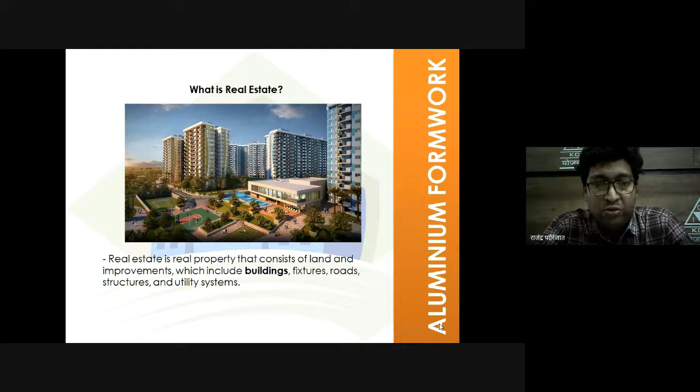So what is real estate? A real estate is a real property that consists of land and its improvements, which include building, fixtures, roads, structure, and utility systems. These are categorized into four: land, residential, commercial, and industrial building. Except land, these three come under the building sector.

The construction industry is rapidly changing, and new materials and technologies are being introduced on a regular basis. The execution of construction projects and their timely delivery has become a prime concern for developers, in view of buyer aggression on delay in constructions, especially after RERA, which emphasizes the need for timely completion of projects. So adoption of modern technology has become the need of the hour.

Rising industrial, residential, and commercial growth is driving demand for faster construction and world-class quality. So it has become imperative to use newer products and technologies to meet this increasing demand.

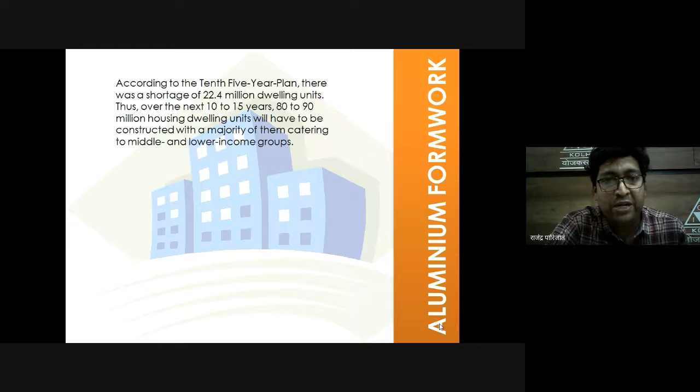As per the 10th 5-year plan, there was a shortage of 22.4 million dwelling units. Thus, over the next 10 to 15 years, 80 to 90 million housing dwelling units will have to be constructed, with the majority catering to middle and lower income groups.

The construction industry is an integral part of the country's infrastructure and industrial development. Today India's urban population is the second largest in the world, and its future development leads to increased demand for housing.

As per the Federation of Indian Chamber of Commerce and Industries, that is FICCI, keeping in view the existing housing crisis, the country shall need an additional more than 2.5 million new dwelling units annually.

So we need to plan for a rapid creation of dwelling units, because construction is a very complex process involving basically the areas of architectural planning, engineering, and construction.

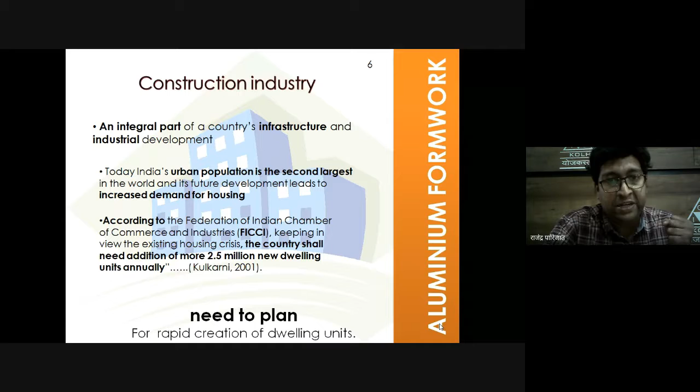We need to plan dwelling units which are affordable shelters to the masses, with speed of construction and faster turnover, creating a large stock in the shortest possible time. These are the elements of these dwelling units.

So now we can see which are the present technologies available in India. The first one is prefabrication technology.

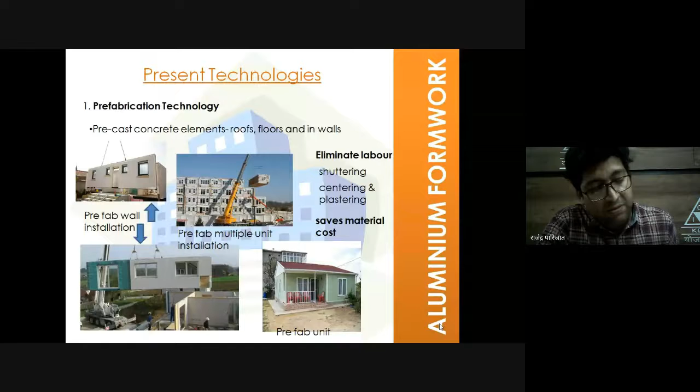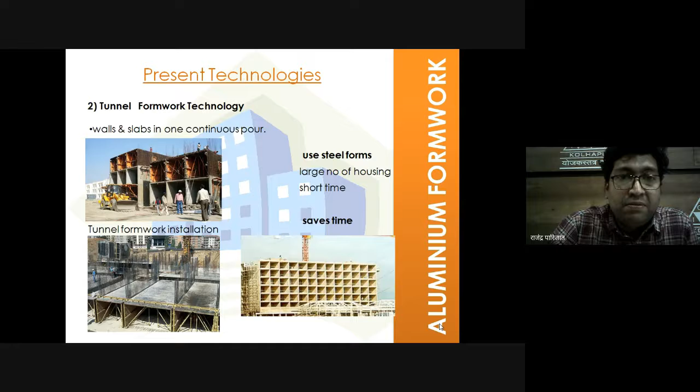Another technology is Outinord technology. It is a fast track construction system allowing the concrete walls and floors of structural units to be constructed in a 24-hour cycle only. Typically 2 or 3 complete structural bays are poured and struck during each 24-hour cycle using the same set of forms. This method is up to 3 times faster than the conventional timber formwork frame structure method.

This is a superior wall form system, known as the superior wall form system. It uses high quality steel with high performance quality control, making it a vastly superior technique.

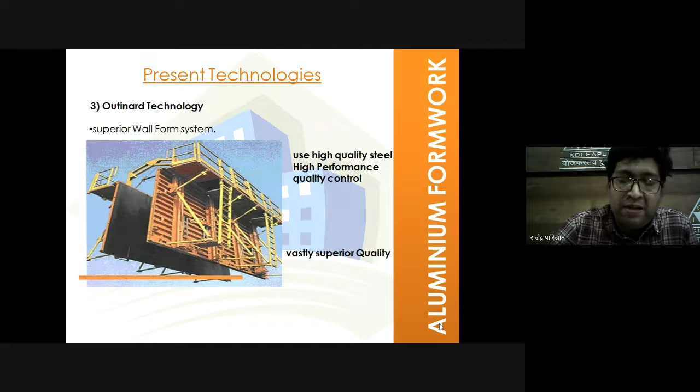Mascon forms all the concrete in a building, including walls, floors, slabs, and balconies, as well as window hoods, curved and decorative features, columns, and beams. Mascon enables all concrete to be cast monolithically, thereby eliminating joints. It completes the entire structure of the building at a rate of 4 days per floor only. All Mascon forms are erected and dismantled without cranes, using unskilled laborers equipped with only hammers.

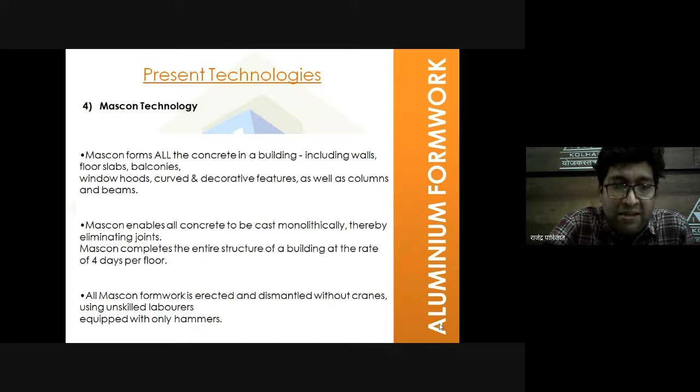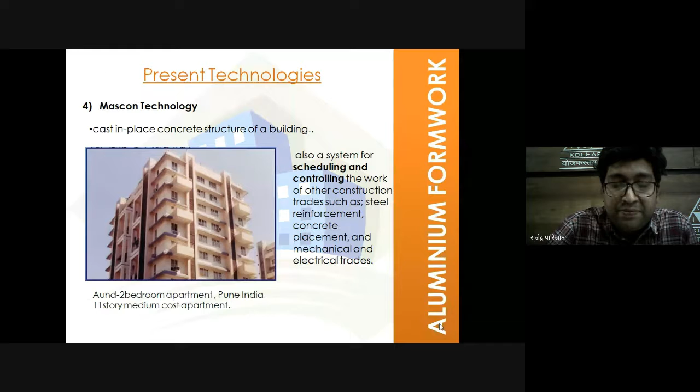So these present technologies have various possibilities and alternatives present in the market, but they are risky in nature. The financial viability of a project over long-term investment could significantly be affected at various phases of construction, leading to considerable time and cost overrun. We can see many government projects where the initial cost is, for example, 300 crore, and after a few years the cost gets upgraded to 600 crore or more - this is because of time and cost overrun of the project.

So there is a study about project stages and appraisal: the pre-feasibility stage of the project, then the technical appraisal - that is technical sanction if required, then the commercial appraisal, that is commercial viability of the project, then the financial appraisal, and topmost is the risk analysis of the overall project, which has to be studied during these project stages.

For determining the optimal strategy and market potential for adopting technology, certain common aspects have to be studied: studying various technologies available in India, selecting a good technology in the market, technological collaboration arrangements if any, the size and scale of operation, the location aspects of the project and availability of infrastructure facility.

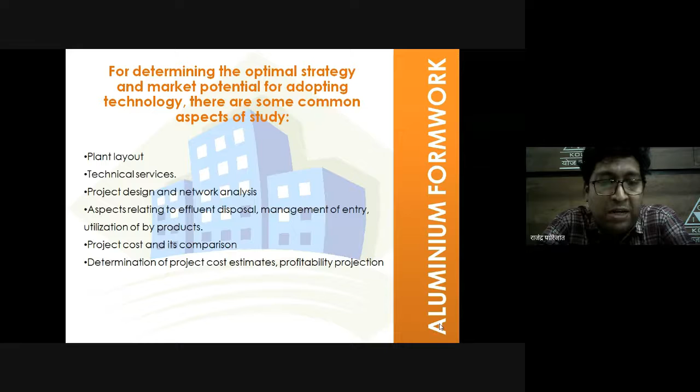Then comes the selection of plant machinery and plant layout, the technical services required, the project design and networking analysis using software like MS Project, aspects relating to effluent disposal management, utilization of byproduct, and the project cost and its comparison. Like if we take regular formwork and Mascon formwork, the project cost and its comparison have to be done. So determination of the project cost helps establish the profitability of the project.

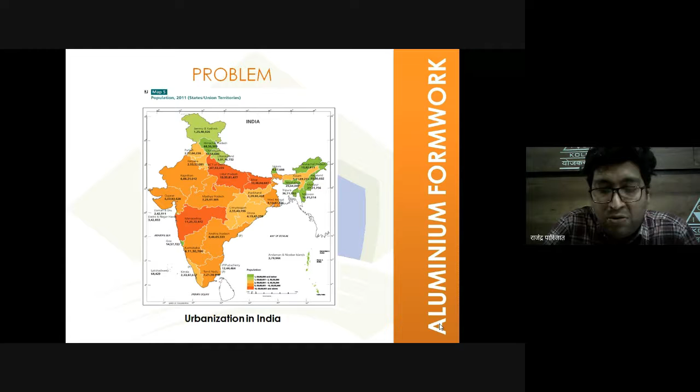So what is the problem? This picture shows the overall density of the Indian states. The dark picture shows the higher density, that is Maharashtra, Uttar Pradesh and Bihar have highly populated urbanized areas. After Uttar Pradesh, Maharashtra is the second largest populated state in India, that is approximately 11 crore.

So there is a housing demand. Because of this, there is a shortage of housing in India in both rural and urban sectors.

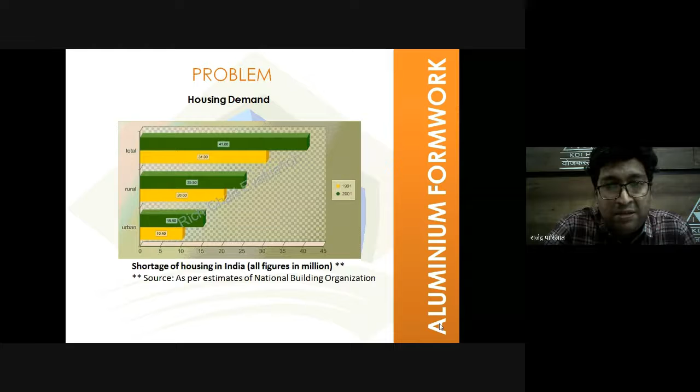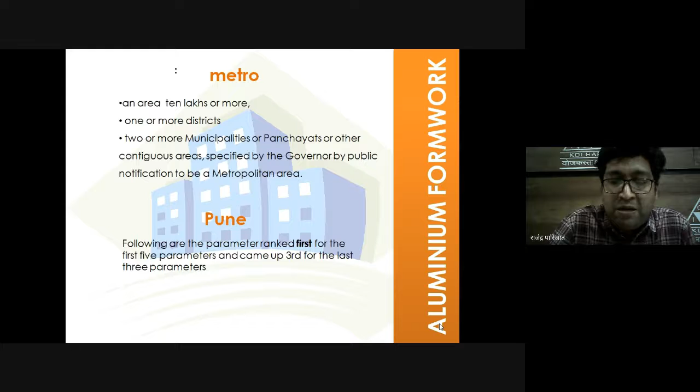So if we see Pune in Maharashtra, the following are the parameters ranked first for the first five parameters and come up to third for the last three parameters. Let's see what those parameters are.

The first one, business environment. Second, real estate cost and availability. Third, infrastructure availability. Fourth, educational institutes. And employment opportunity.

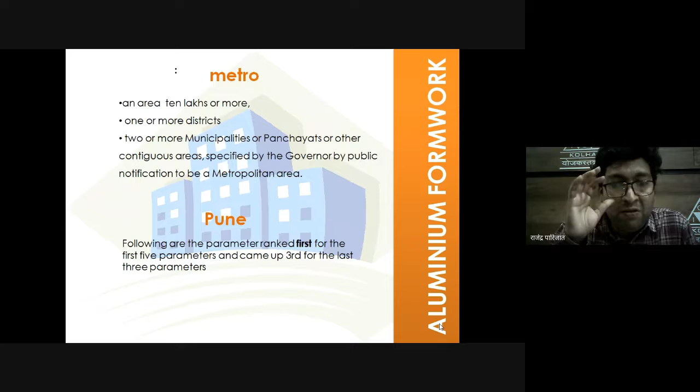Pune ranked first for the first five parameters, that is up to employment opportunity. Pune ranked first for this criteria, whereas social infrastructure, financial services, and transportation facility come third for Pune.

So Pune is growing on all four sides with different township projects like Blue Ridge and Megapolis Township on 150 acres of land with 1,500 crore of investment, whereas Amanora has 400 acres of land with 10,000 crore of investment, and the Paranjape scheme has 138 acres of land.

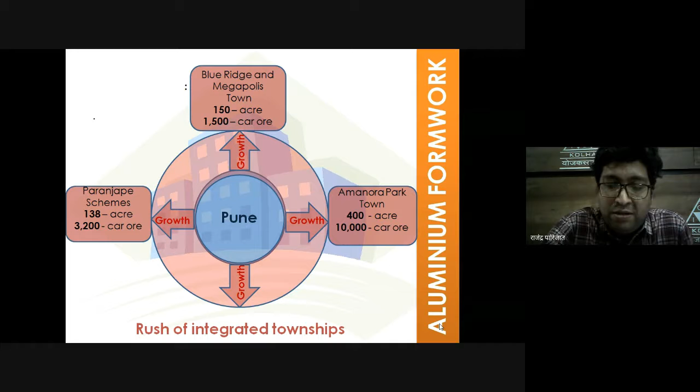So there is a rush of integrated township projects in Pune. This picture shows the Blue Ridge and Megapolis township situated on 150 acres of land with 1,500 crores of investment. In such an integrated township, facilities like commercial market, gardens and schools etc. are developed on a single site.

This is Amanora Park, the largest township in Pune, situated on 400 acres of land with 10,000 crore of investment. This is the Paranjape scheme with 138 acres of land and 3,200 crores of construction investment.

So there is a need to use formwork systems for the success of a construction project, because it gives speed to construction along with safety, cost and quality. So the construction project's success depends on these four parameters.

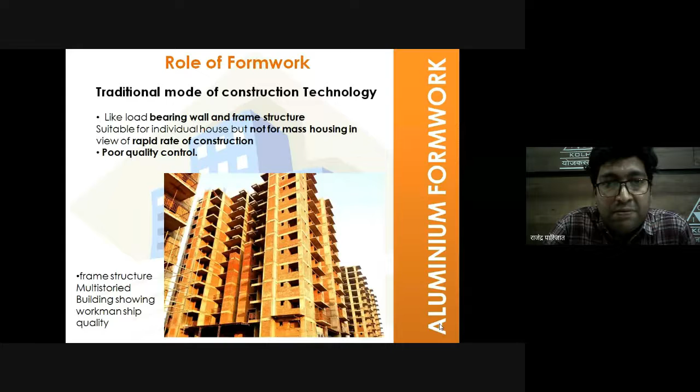So what is the role of formwork? The traditional mode of construction technology, like load bearing wall, has poor quality control. So there is a need for technology which gives a fast construction rate, good quality and is also durable.

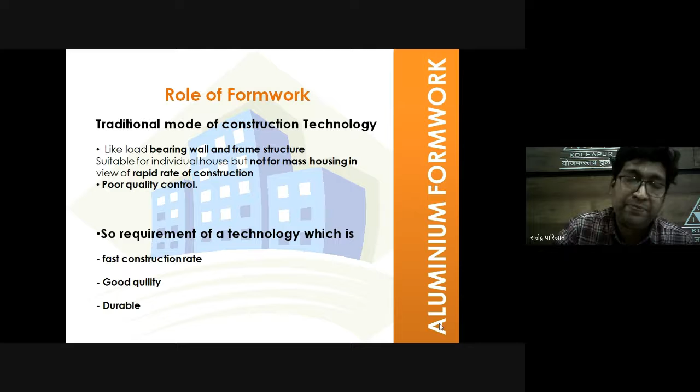So what are the different types of rapid construction? This is cast-in-situ construction where wall panel units and slab units are directly added by use of aluminum and steel, that is tunnel formwork, with companies like Mascon system or Mivan system situated in Malaysia. This aluminum shuttering was introduced in India more than a decade ago. Though sparingly used in the past, the technology has now gained wide acceptance and is present in most high-rise construction. Aluminum shuttering increases the overall cost of construction but reduces the construction time, which allows developers to start sales earlier than planned.

Timely delivery of the project is one of the prime concerns, owing to regulatory reforms and escalating construction costs. Aluminum shuttering has become a savior. In conventional building techniques, transportation of building material such as bricks and wastage of materials during carriage and handling makes construction more expensive than aluminum shuttering.

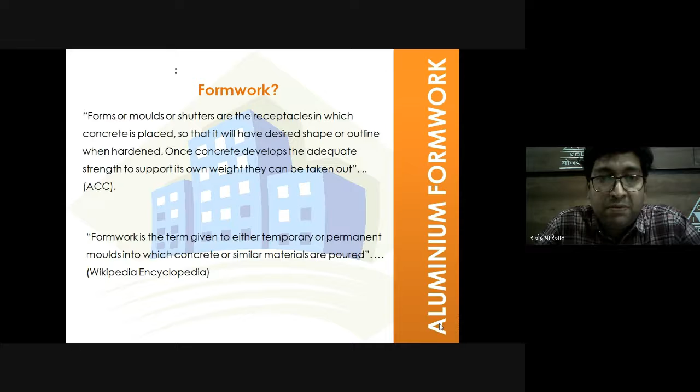Formworks are then classified into five parts: size, location of use, materials of construction, nature of operation, and brand name of the product. As per size, there are only two sizes of formwork, known as small size and large size. Any size which is designed for operation by workers manually is small size.

So very often the erection process is preferably handled by a single worker, with site work best done independently to avoid possible waiting times. Due to reasons of size and weight, the materials of construction of small size formwork are thus limited. At present, the most common systems are made of timber and aluminum and are usually in the form of small panel sizes. In case of large size formwork, the size of the form can be designed as large as practicable to reduce the amount of joints and minimize the amount of lift.

The stiffness required by large size formwork can be dealt with by the introduction of more stiffening components such as studs and soldiers. The increase in the weight of the formwork panels is not significant, as a crane will be used in most cases because of the large size.

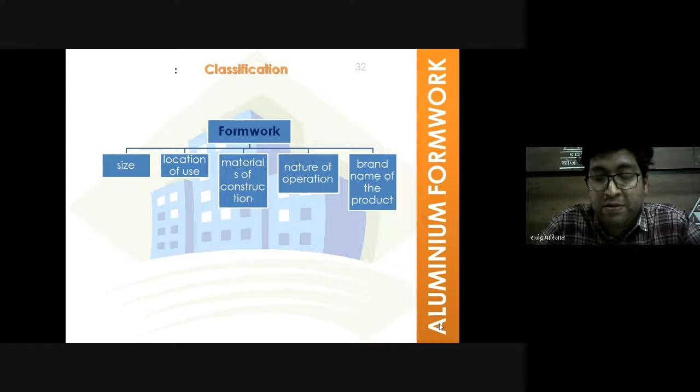So in technical consideration of selection of formwork, there are some design related factors. Like in the picture we can see the shape of building is abstract. Simple block shaped buildings are no doubt much easier to construct than buildings of awkward shape, such as with curved or inclined, stepped, undefined, or sculptural features. As a general rule, awkward shaped buildings can be much easier to deal with using more traditional, labor intensive formwork systems for their better adaptability nature.

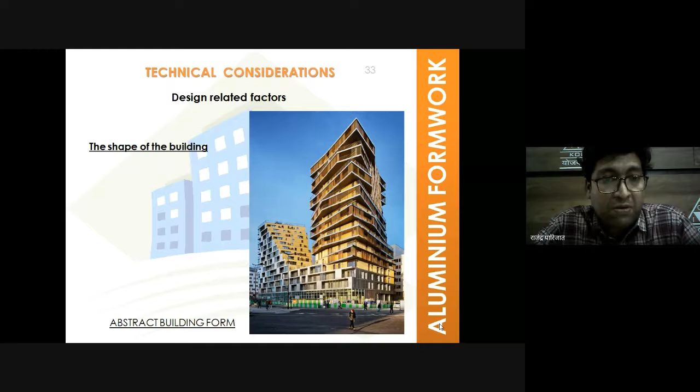So the design of external wall. First we have seen the shape, the second one is the external wall. The design of external walls, like in the picture we can see there is use of flower bed. Some buildings may have a lot of architectural features on the building exterior, such as fins, ribs, shading blades, planter boxes like in this picture, deep ribbed windows, hoods for air conditioner units or alike. This may limit the choice of using system type of formwork due to provision or interruption of the features during the casting process.

Because the form is a cast. So again, the third one is the interior internal layout of the building.

So these are some design related factors in which we can see the comparison. First one is a complicated layout, that is they are not of a linear shape, whereas the second is a simple layout. Some buildings may have a very simple layout with a few in-situ walls and frames with regularly located columns, like most commercial and office buildings. Whereas some have very complicated internal walls like in this picture, most are load bearing in nature, which makes the casting process very difficult.

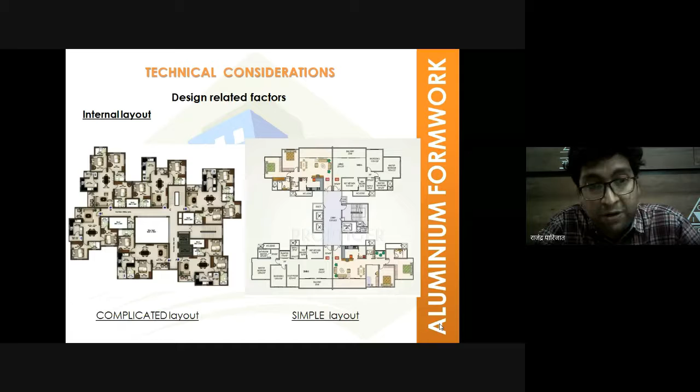So again, the structural forms. Similarly to internal layouts, the structural form of the building will also affect the options of formwork. For example, a building with a structural core in the form of a vertical shaft will limit the use of other formwork systems other than those of self-climbing nature. A building with a flat slab design similarly will have table forms or flying forms as the most optimal choice of formwork. For buildings with regularly arranged shear wall design, the natural selection will be large panel type steel forms or other types of gang formwork.

So the next one is the consistency in building dimensions. The design of some buildings may involve a lot of non-standardized dimensions to cope with architectural design and layout, or to fulfill other structural requirements, like the regular reduction of size of beams, columns and walls. As we go to the next floor, there is a reduction of column sizes. Because of this, for high-rise buildings as the structure ascends, some formwork systems like climb form or steel form may be quite difficult to use in such a situation, for the frequent adjustment of the form to meet the change in dimension may eventually incur extra cost and time when amendments are to be carried out during the course of construction.

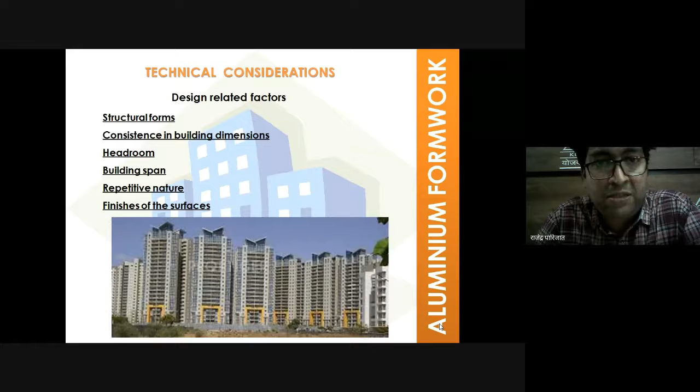Then the last one, the finishes of the surface. It is well understood that fair face concrete demands very high quality formwork in terms of surface treatment. The grout tightness of the formwork joints and dimensional accuracy requirements are a bit relaxed where the concrete surface will later be finished. So all these are some design related factors which are considered in formwork selection.

So again, as per type of material, formwork is again classified into four categories: timber formwork, plywood formwork, steel formwork, and aluminum formwork. This photograph shows the use of timber formwork on site for columns with batten and plywood, and timber formwork for column and beam.

Timber formwork should satisfy some requirements. The timber should be well seasoned, otherwise it will sag. It should be lightweight for handling, and easily workable with nails without splitting. Some timbers, when seasoned, cannot have nails punctured into them, so such wood cannot be used for formwork. It should be easily workable with nails and free from loose knots.

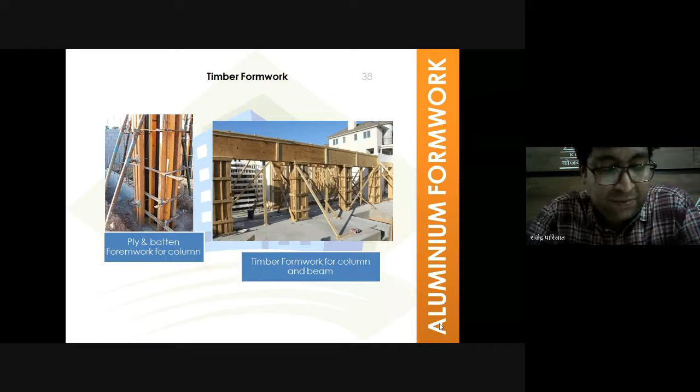In view of some considerations: it is possible to have a smooth finish, in which case there is no cost on surface finishing. With large size panels, it is possible to save labor cost in fixing and dismantling. The number of reuses is also more compared with timber shuttering. For estimation purposes, the number of reuses can be taken as 20 to 25, meaning plywood can be repeatedly used up to 20 or 25 times more than timber.

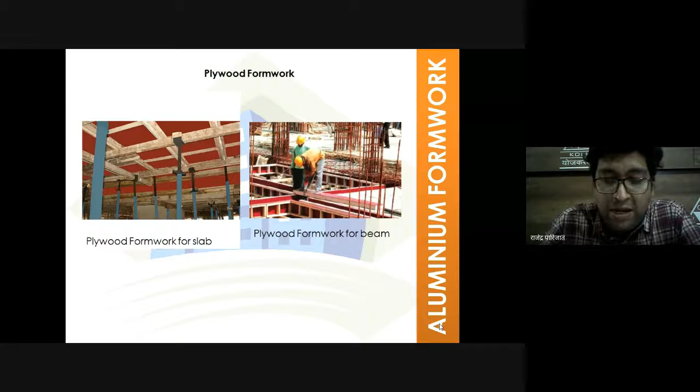The panels can be fabricated in large numbers in any desired modular shape or size. The last one is aluminum formwork, where the panels are made from high strength aluminum alloy with the face or contact surface of the panel made up to 4mm thick plate, which is welded to the formwork of specially designed extruded sections to form robust components.

The panels are held in position by a simple pin and wedge system that passes through holes in the outside rib of each panel. The panels fit precisely and securely and require no bracing. The walls are held together with high strength wall ties while the deck is supported by beams and props. Since the equipment is made of aluminum, it has sections large enough to be effective yet light enough in weight that it can be handled by a single worker without skilled labor.

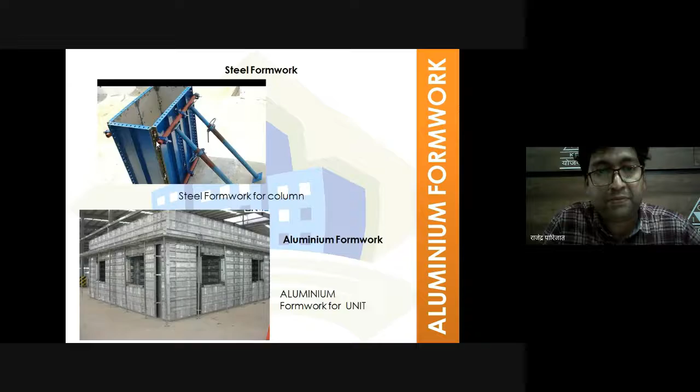Some comparative factors: conventional construction quality is normal, whereas aluminum formwork gives superior quality and is good for large scale housing systems. If we compare speed of construction, the conventional construction system is very slow and step by step, whereas aluminum formwork has a high cycle time of 4 to 7 days, so the site is erected in minimum time with faster technique.

Regarding the aesthetic factor, projections in the room can be taken in conventional construction, but in aluminum formwork there should not be any projection because it is a molding type of formwork. For external finishes, cement plaster and brickwork require frequent painting after 3 years in conventional formwork, whereas in aluminum formwork a textured pattern colored concrete fascia is used, which requires no frequent repainting. So a permanent fascia finish is feasible with only minor extra initial cost in aluminum formwork.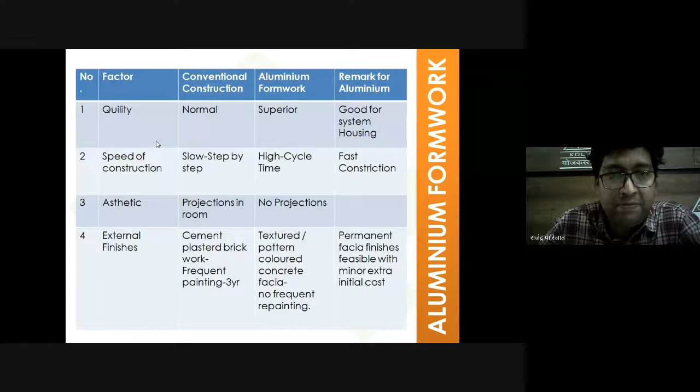The next one is useful carpet area, that is sellable area. In conventional formwork, it is effective up to only 83.5%, whereas in aluminum formwork, because of the smaller size of wall, it is used efficiently up to about 87.5%. So there is more efficient utilization of land for useful living space in aluminum formwork type of building.

Consumption of basic raw materials like cement is normal in conventional system, whereas in aluminum formwork consumption is more than conventional structure because steel is also used for the wall. So the strength and durability is also more than the conventional system. Reinforcing steel is less in conventional formwork, whereas it is higher in aluminum formwork, so safety against earthquake can be achieved in aluminum formwork.

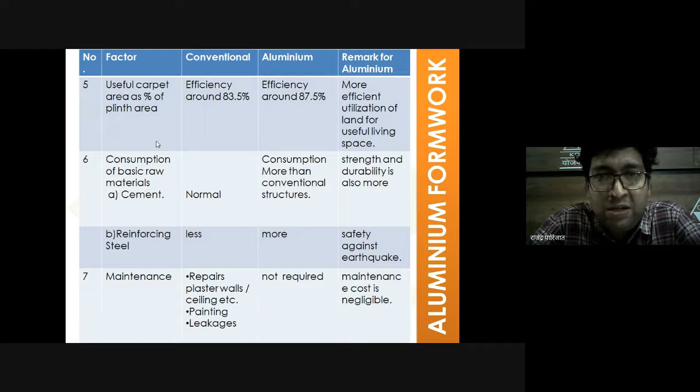Next is maintenance. In conventional construction, there is often repair of plaster walls and ceilings, painting, and leakage issues. Whereas in aluminum formwork technology, there is no maintenance required afterwards, so the maintenance cost is negligible in aluminum formwork system.

So what is aluminum formwork? Aluminum formwork is fabricated in aluminum. All elements of a building are constructed with cast in place concrete, giving quality surface finish and accurate dimension tolerance, and construction speed is very high in aluminum formwork.

Construction with aluminum formwork involves different activities: pre-concrete activities, concrete activities, and post concrete activities. Pre concrete activities means before concreting. Concrete activity means during concreting, and the last one, post concrete activities, means after concreting.

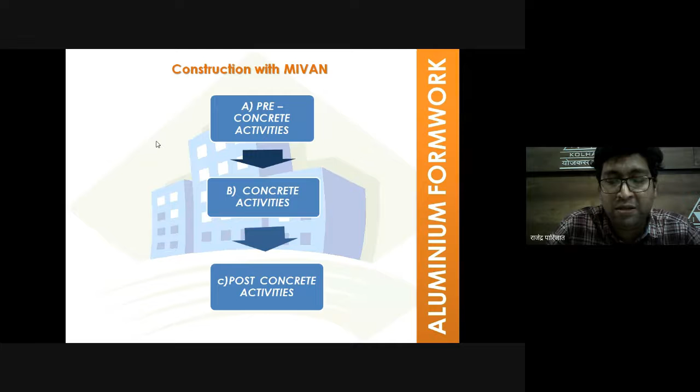What are the activities? In pre concrete activities, first the receipt of equipment on site is checked as per order. Then the level survey, where checks are made to maintain horizontal levels. Then setting out, where the setting out of the formwork is done, with control and correction of any deviation carried out at this stage.

Then erection of formwork, where the formwork is erected on site. The deck form is erected for the labor to work on, and setting of kickers, which are provided over the beam.

Then the concrete activities. There is dislodging of pin and wedge due to vibration that has to be checked. At least two operators should be on standby on site during concreting to check pins, wedges, and wall ties as the pour progresses. Missing pins, wedges and wall ties could lead to movement of the formwork and possible damage, requiring remedial work after striking of formwork.

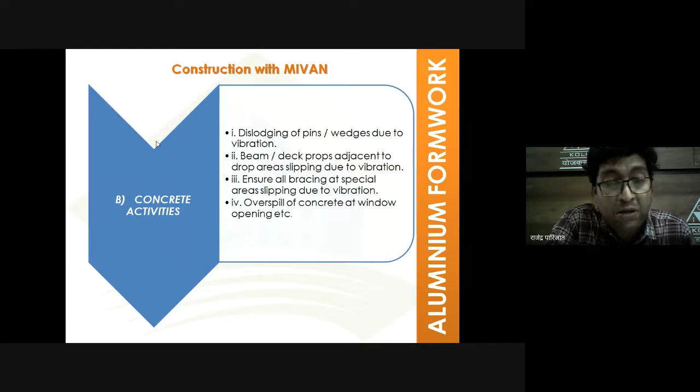Then the post concrete activities. This includes striking of wall forms, which requires striking down the wall forms, striking of deck forms which are removed after concreting, then cleaning, transporting and stacking the formwork, and striking of kicker formwork where the kickers are removed.

The wall is fitted on the next floor, with erection of the wall mounting working platform. Normally all formworks can be struck after 24 hours.

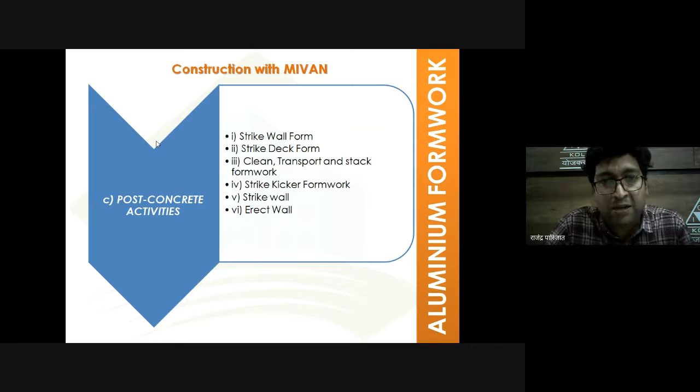After concreting, the walls are removed. Striking of all forms can be done within 10 to 15 hours. The only tool required for dismantling is a hammer, because this is a simple pin and wedge system used in this type of formwork.

How it works we can see in our video in detail. After that, there is erection of deck for the next floor, and then again erection of wall forms to be placed on site after reinforcing of the wall.

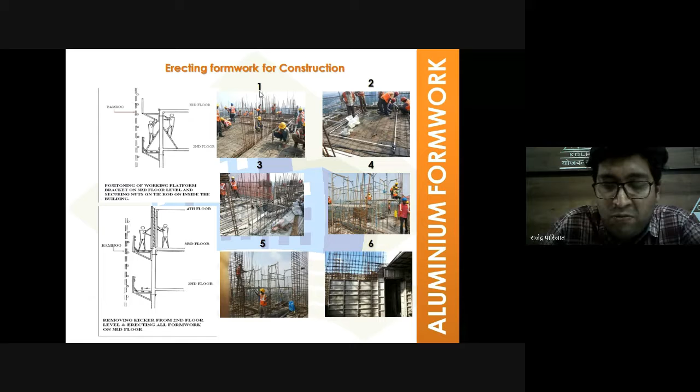In the installation process, there are 10 installation stages: surveying and setting out of formwork, then installation of wall and column reinforcement bar. After surveying, there is installation of wall and column reinforcement. Then after reinforcing, the column and wall panels have been erected. After that, installation of beam panels follows, and we can install beam panels and install the slab panels.

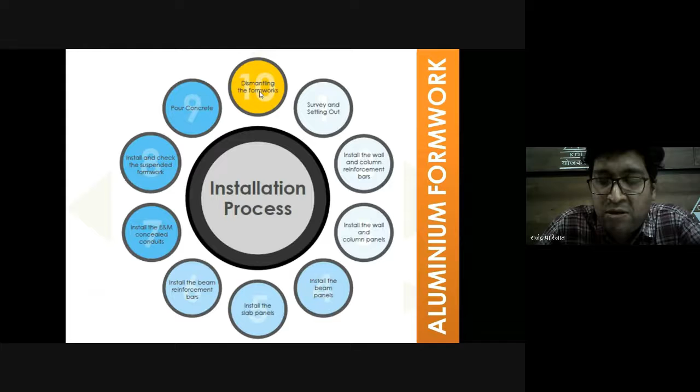After that, installation of the beam reinforcement bars, then installation of E&M, that is concealed conduiting, and after that install and check the suspended formwork, and the last stage is pouring of concrete. So this cycle keeps going on at the aluminum formwork construction site, that is one formwork cycle.

So if we check and compare the speed, this is a well synchronized work cycle for a period of 7 days only, planned for 1,000 square meters approximately. So the first activity is deshuttering.

It requires 12 to 15 hours. Again, the positioning of brackets requires 10 to 15 hours. After that, lifting and fixing of the panel requires 7 to 10 hours. The kicker and external shutters required 7 hours, whereas wall shutters are erected in 6 to 8 hours.

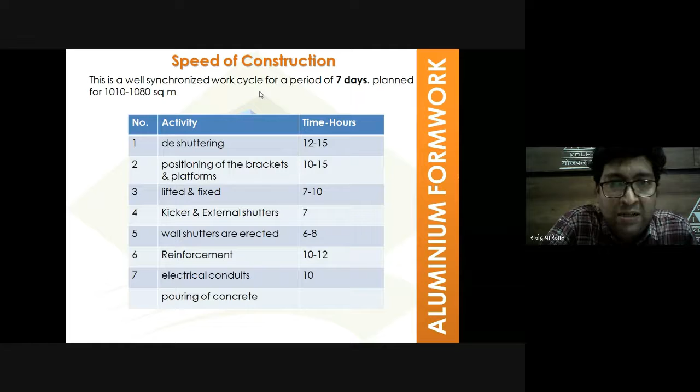Then reinforcement for beam and slab requires 10 to 12 hours. After that reinforcement, the electrical conduits are laid, and then concrete pouring is done. So these are simple 7-stage activities in aluminum formwork technology.

On our basis, compared day by day: on the first day, the erection of vertical reinforcement bar on one side of the vertical formwork, and on the second day, the erection of the second side of the vertical formwork and for the floor.

Then on the third day, fixing of reinforcement bar for the floor slab and casting of walls and slab. And on the fourth day, removal of vertical formwork panels after 24 hours, leaving the props in place for 7 days, and floor slab formwork in place for 2.5 days.

So what are the advantages? The total system forms the complete concrete structure, that is, we create a monolithic structure in this system. It can be custom designed to suit the project requirements, as per customized shape. So unsurpassed construction speed, high quality finish, and cost effective.

The panels can be used up to 250 times, whereas conventional wood formwork we can use only 20 to 25 times for plywood formwork, whereas timber formwork only 8 to 10, up to 12 times. So erecting can be done using unskilled labor.

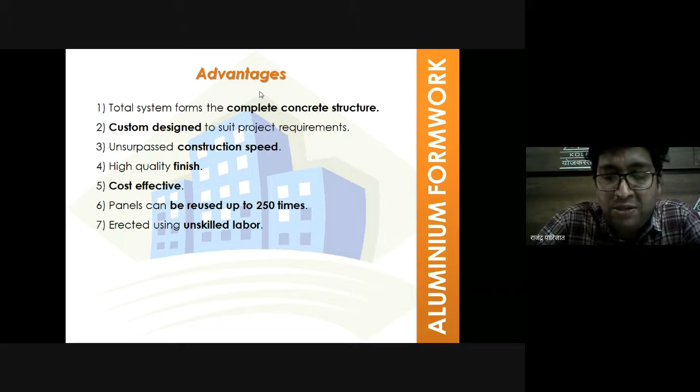But there are some limitations: because of small size, finishing lines are seen. Due to small thickness, concealed services become difficult. It requires uniform planning as well as uniform elevations to be cost effective. Then a large volume of work is necessary; at least a minimum of 200 repetitions are required for using this kind of formwork system.

So the spacers are at 2 feet center to center, that is the panel size. There are chances of seepage or leakage during the monsoon. Due to box type construction, shrinkage cracks are likely to appear. Along with this, the heat of hydration is high due to the shear wall type of construction. So there are some limitations.

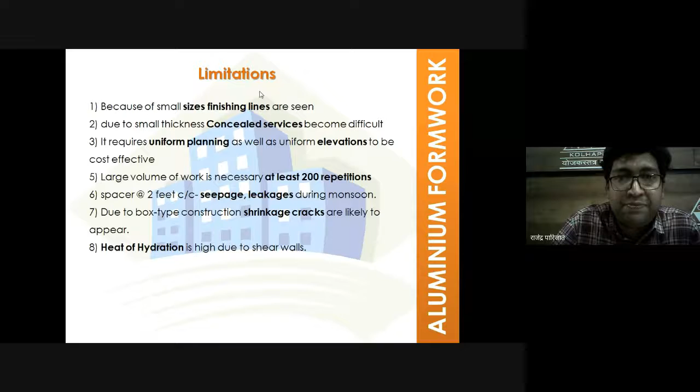So now, some case study—I have done a case study. This building is situated at Navi Mumbai. The client is Lodha, and the contractor is Larsen and Toubro, that is L&T. There are 3 towers having 2 blocks on each tower, that is in plan the central block is a staircase block, and the first and second are only 2 blocks of residences. So the design type is load bearing wall and slab.

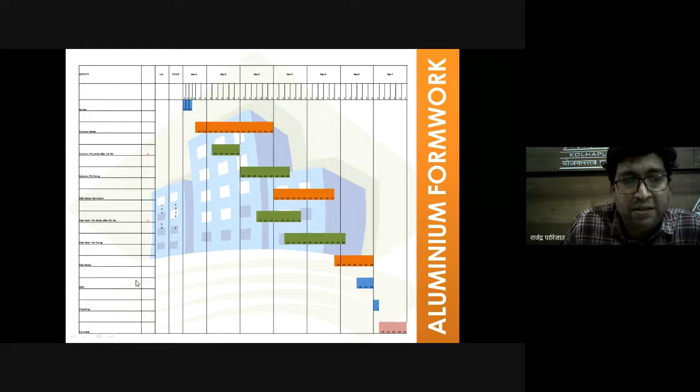The slab deck formwork is shown in green, then slab deck formwork fixing, then slab rebar again, and MEP - this blue line indicates MEP work - and again checking, which is the last stage. After checking, the concreting work is done.

In another case study, the Amanora Park Town Aspire Towers, Pune, has 22 floors with consideration of 10 towers. The number of typical floors is 22.

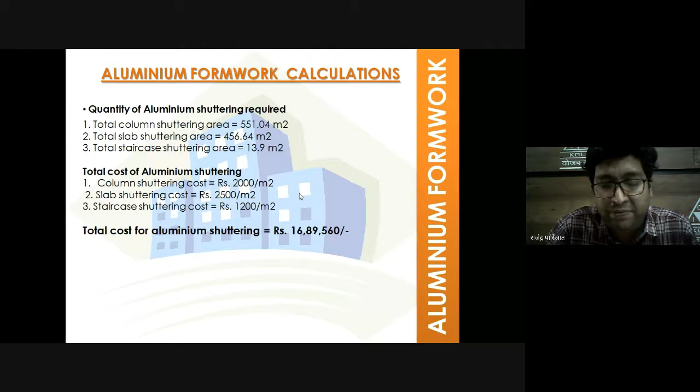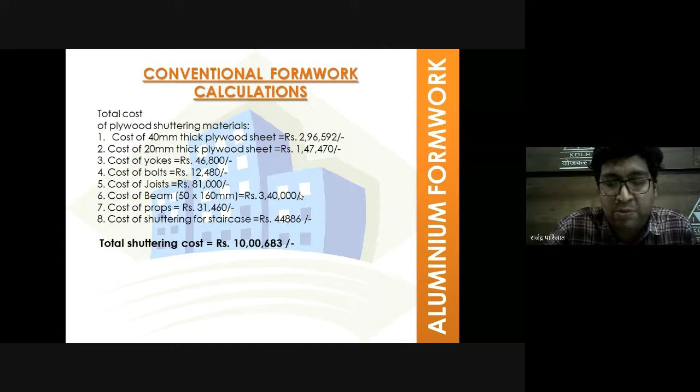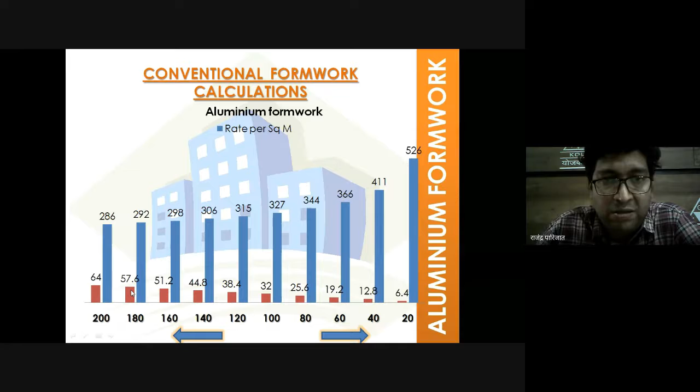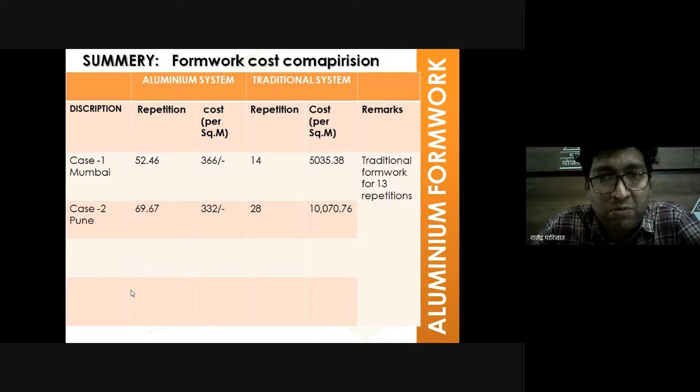So these are some total costs per square meter that have been calculated. The speed of construction compared to conventional is very high. Conventional formwork requires 140 days for this activity, whereas aluminum formwork required only 40 days - that is 3.5 times faster than conventional formwork.

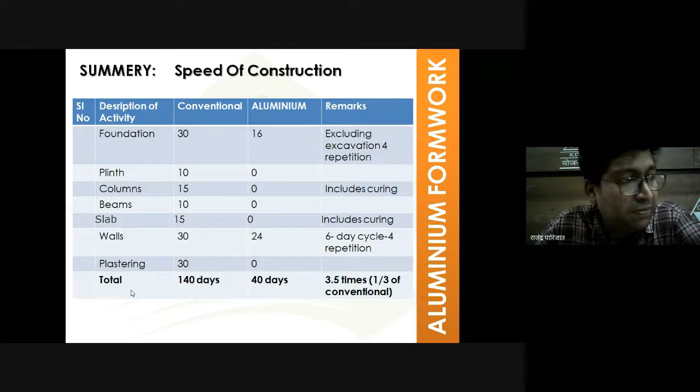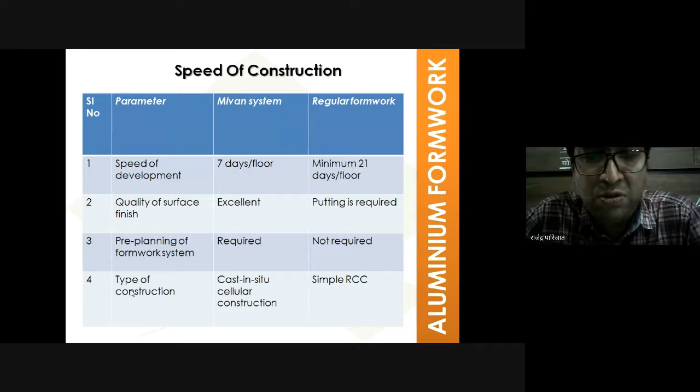Speed of construction is 7 days per floor for aluminum formwork, whereas regular formwork requires 21 days for a single floor. The quality of surface is excellent in aluminum formwork, whereas regular formwork requires putty. Pre-planning of the formwork system is required, whereas regular formwork does not require pre-planning. The type of construction is cast-in-situ, whereas regular formwork requires a simple RCC structure. Wastage is very little in aluminum formwork, whereas regular formwork has comparatively higher wastage.

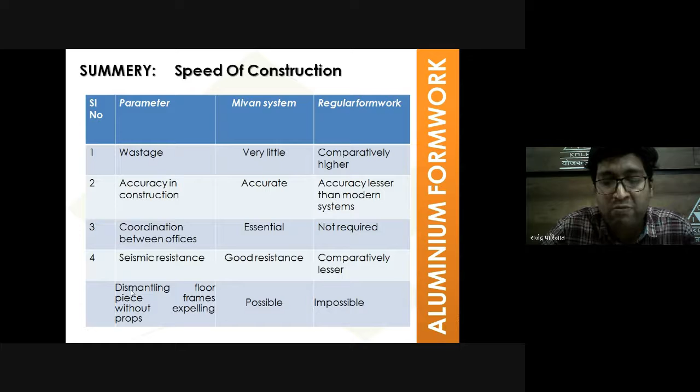Accuracy in construction is higher with aluminum formwork compared to regular formwork. Coordination between offices is essential with aluminum formwork, whereas regular formwork requires no coordination. Seismic resistance is good with aluminum formwork, comparatively less with regular formwork. Dismantling of pieces without props, floor frames, is possible, whereas in regular formwork dismantling is not possible after concreting.

So it serves as a cost-effective and efficient tool to solve the problems of mega housing projects. This construction method is able to provide high quality construction at unbelievable speed and reasonable cost. This technology has greater potential for application in India to provide affordable housing to its rising population.

Time-consuming repairs and modifications due to poor quality work generally delay the job and have additional financial impact on the project. So housing alternatives with low maintenance requirements may be preferred even at a slightly higher initial cost.

Thank you. Lastly, we can see a small video of aluminum formwork, how it is installed, as we discussed in previous slides. Ma'am, can we play it?

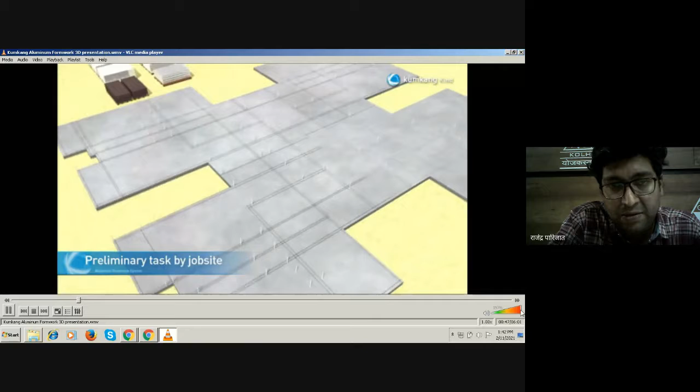After the structural line, the rebar has been done for the walls.

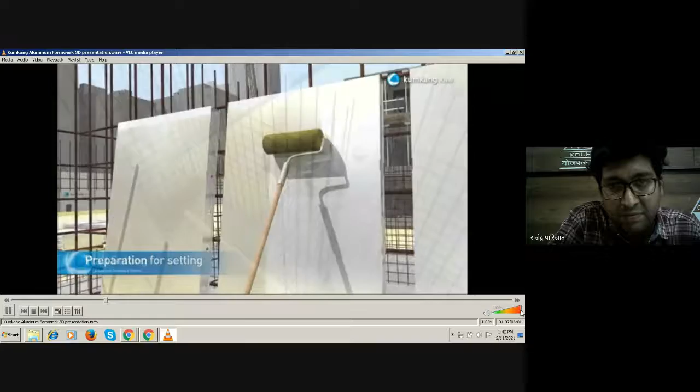This is a simple pin and wedge system. This is a pin, and this is a wedge.

After the wall panel, installation at the opening area has been done.

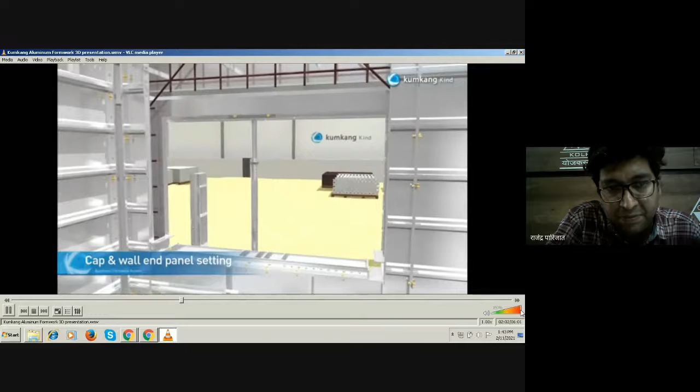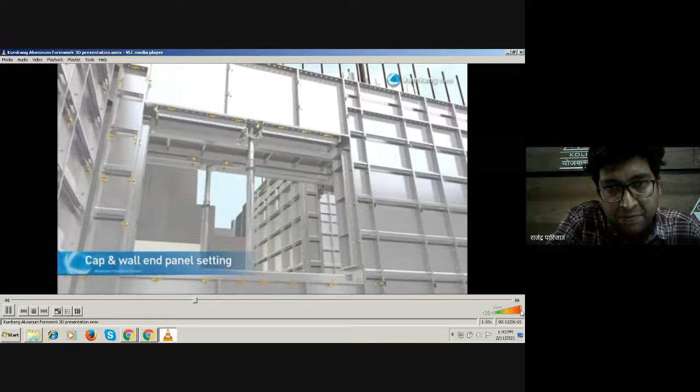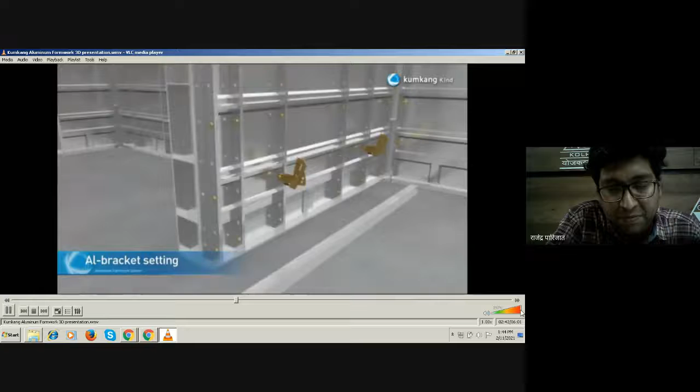These are kickers - after wall panels, kickers are installed. The topmost portion of the panel is the kickers. Horizontality is set to ensure proper alignment. These are prop heads.

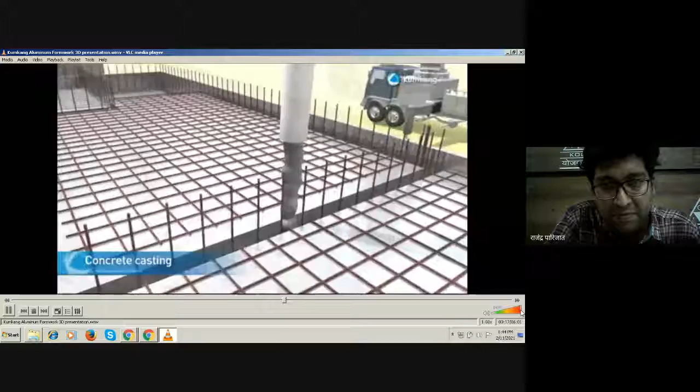After 24 hours, the wall panels are removed and dismantled.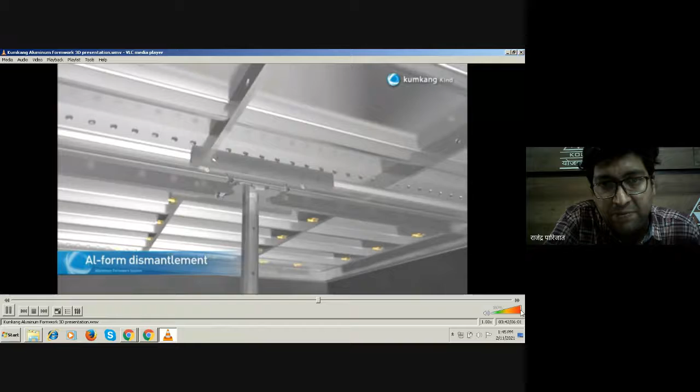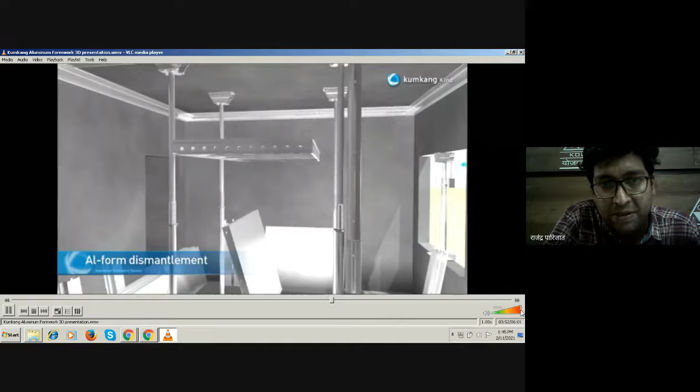After that, the opening area has been removed, but the striking props and prop heads are placed on the same area.

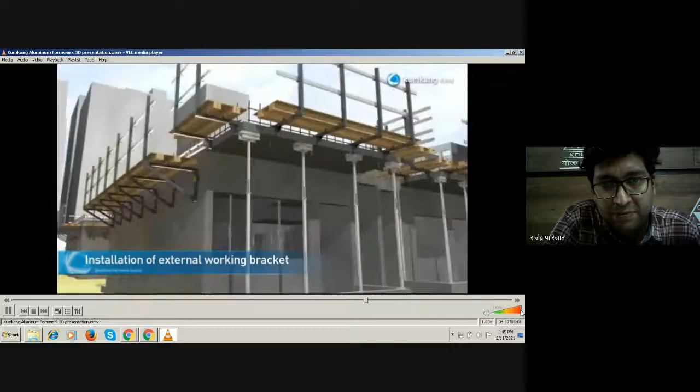After 24 hours, bracketing has been done for the next cycle, for safety and workmanship.

Again, the same cycle has been repeated - the installation of wall panels after rebarring.

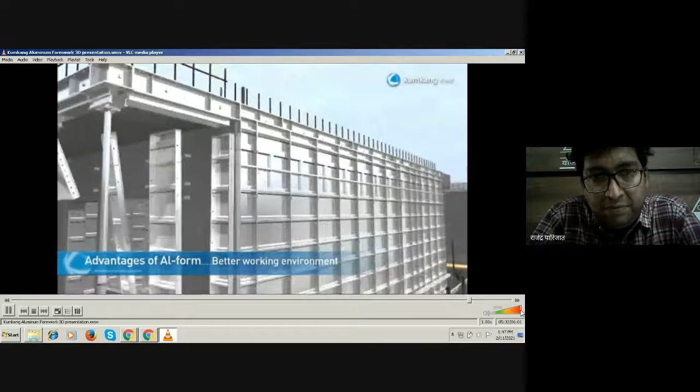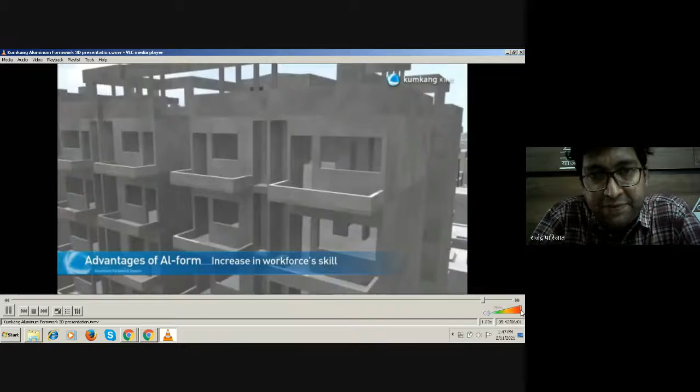Again, the cycle is repeated after 7 days. So a single floor required only 7 days to complete using this type of formwork.